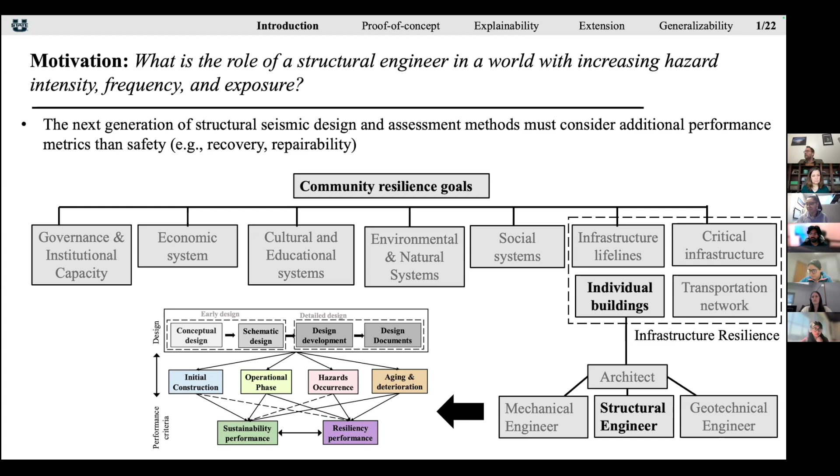Now, being a small part of a big thing is never a bad thing, right? That doesn't mean our contribution is small, because the way I think about this is that we have this very complex problem in front of us. It's all about how we can bring design and assessments together, where we can think about initial construction, operation, hazard, and aging and deterioration of the systems, and then connect all these different aspects of our infrastructure to think in terms of performance metrics. Now, what I was really interested in was resiliency, but also sustainability. And these metrics, I think in the future years, irrespective of how we think about them, are gonna be very important for the science.

Now, for those of you who may not have heard about performance-based engineering, it is really a way of thinking about systems, a probabilistic and modular framework. Typically, it came originally from the earthquake engineering world, but it has been applied to all other different hazards. For some other hazards like wind, we have a very well-defined performance-based engineering system. But for some other hazards like tsunami or hurricane, all the modules are still under active research. Now, in all these different frameworks, there are some commonalities. They all have a hazard analysis, which talks about the intensity, frequency, and the exposure that the system's gonna get from this hazard. It always has this structural analysis portion that talks about how the system will behave to the intensity and the frequency of the hazard.

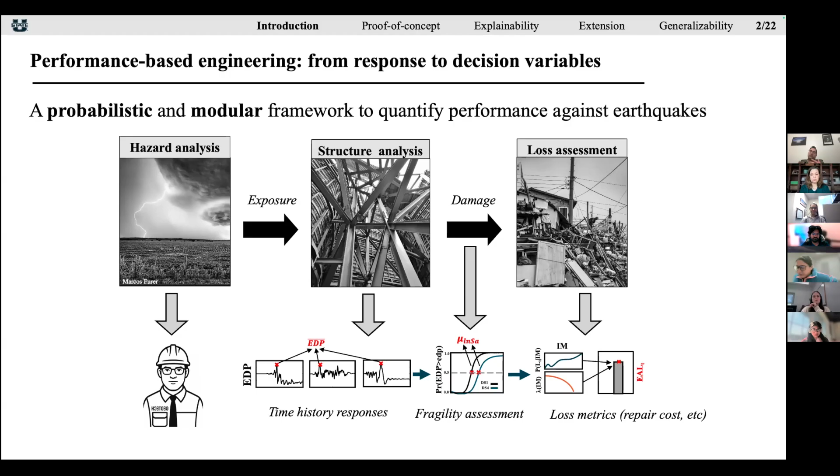And then what I call loss assessment, though that's a loose term, this is really trying to connect the damage and the responses from the systems to what's going to happen on the decision making side. And this can be repair time, recovery, downtime. Maybe you've heard about functional recovery. There are many, many metrics that are becoming increasingly important as we start to think about community resilience.

Now, how did all of this start? Really, when I started my PhD in 2018, my advisor was like, well, you seem pretty interested in this and you really like machine learning. And at that time, full disclosure, machine learning was there, but it was before the generative AI boom of machine learning, right? So at that time in 2018, I thought maybe I can bring everything that I like under one unified system.

And the idea was, can we use machine learning to support performance-based assessment and design, because they need a lot of different kinds of simulation, many components that go inside these frameworks. And we thought that maybe by using machine learning, we can create surrogate models. And these surrogate models can serve as some computationally inexpensive mappings for us to ease the burden, at least at some point. So it becomes actually an interesting problem of, okay, what are the steps where we want to use machine learning and what are the steps that we want to keep as a physics-based approach.

And then I had this idea, which at that time my advisor was very suspicious about. People were looking at the nonlinear responses and connecting that to the system's properties. But I had this experience as a structural designer. So I was like, can we just focus on the geometric and design parameters of a system and connect them directly to the decision making systems, right? Now naturally the question was, well, a lot of error sources are going to propagate, and then maybe we don't get a good mapping, right? So this is how it all started.

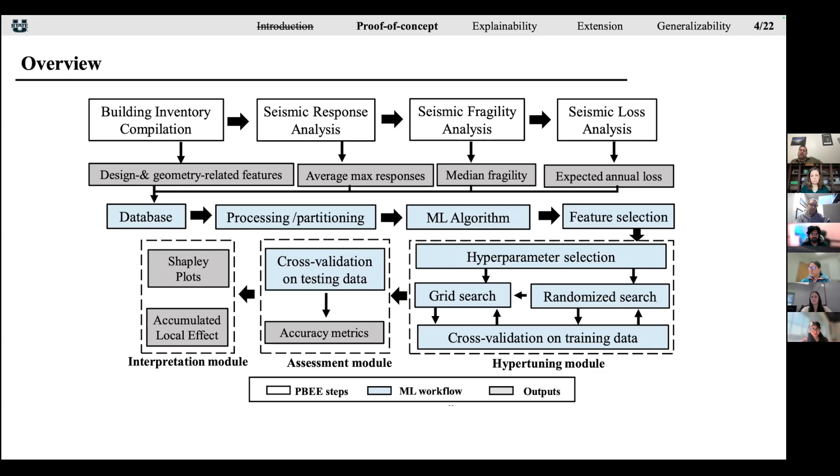Now, back in 2018, I think DesignSafe by NHERI and TACC were pretty new and people were starting to put data there. So I started to look for the data that could support my work. And there were not many open data sets of finite element simulations of engineering systems and even buildings, which was the topic of my NSF project. So eventually I had the idea that maybe I should create the data.

So it started by creating some computational tools and then connecting them in this infrastructure that can go all the way from, and I don't want to call it a very exact design, but it was more of trying to sample these design parameters, then do some initial checks to see if they're even feasible, and then do some sort of nonlinear analysis to see if the life safety objective of the code is met. And after that, I would keep that design and do all the other performance-based assessments that I needed at that time. I'll be happy to talk about this, but I'm trying to keep it short.

We did this and it was very interesting because the place that we chose was Charleston, right? If anybody has worked with Charleston, it has a very interesting seismic situation with a negative epsilon, which means that selecting ground motions is not like places such as California, where there are well-defined databases of ground motions and much research has been done. But for Charleston, it was not like that. And at that time, one of our challenges was to find ground motions for the characteristic earthquakes that we expect at that place, right? And then we worked with some seismologists at Virginia Tech.

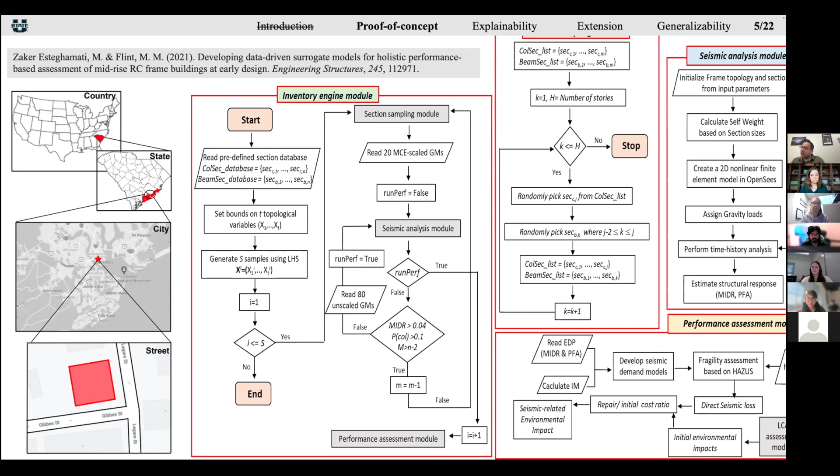We eventually ended up using some synthetic ground motions to be able to do the analysis that we wanted to do. With that being said, and this is back in 2021 when the paper got published, right?

We went through this process, we get our data, we put that data into this machine learning pipeline, look at a few classical machine learning algorithms like support vector machines and random forests and all these different algorithms. And we saw that actually we can do this mapping, and this mapping can provide a good accuracy. And again, I don't want to make this more about, oh, 96% accuracy, so we did a good job. It was more about we saw that we can capture this performance across a good range of the value that we were looking at.

Now, if you're wondering, we captured something called EAL, or expected annual loss, which is basically an annualized repair cost of the building for the possible earthquakes in that region. And this is a metric that has a lot of use for decision making. And our idea was, what if we use it directly as a design target? And if we can find the designs that match a target EAL, then imagine the implications.

Like in future, communities are having structures that are not just built based on life safety, not collapsing on people, but more like, well, for the earthquakes that we expect in this place, we can keep the economic losses to a certain threshold. That would be beautiful if we can do something like that.

Now, as soon as we did that, I started to get interested that, well, I have this support vector machine. This is a block of code somewhere that does this mapping, but it's just hard to communicate that. It's hard to understand what is happening inside this model. And if you've seen support vector machines, it's like a kernel being applied, and you're trying to find this decision boundary and putting the data at the right place. It's very hard to communicate that, and it's hard to understand what is impacting things, especially in a design problem.

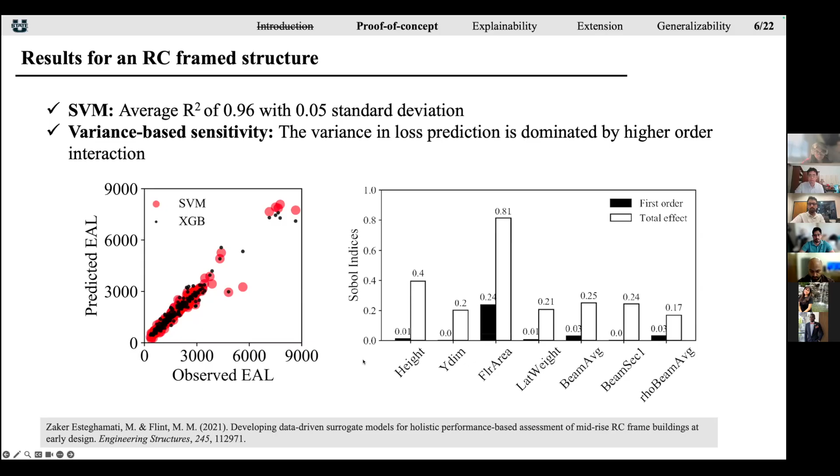How is that affecting the variance in the output? And what we saw here, the black columns are the first order, and the white columns are the total effect coming from all the higher order interactions. And we saw, though the number of features with a strong first order effect is small, all the features in the model had higher order interactions, which to me was a sign that this mapping is actually pretty complex, because all these features are having high second or third degree interactions with each other. And that was kind of a motivation that maybe I should go a bit deeper into explainability of these models.

Now, when I started in my new role, one of the first things I did with my PhD student Shiva was, well, we did it for one database. But maybe I made the database with my own biases in a way that could support this mapping. What if we can find an independent external data set and try the same mapping on that? Now, the good news is that over the years, DesignSafe is now full of data.

So if you're a graduate student doing research, I strongly encourage you to look at DesignSafe. Everybody in the community is helping, and there is so much valuable data. Often we don't know what exists there, but I think you may find something that can be very useful for your projects. And I also invite you to publish your data if you can. Talk to your advisors and see if you can publish your data there. This is what I tell all my students, that we should publish them.

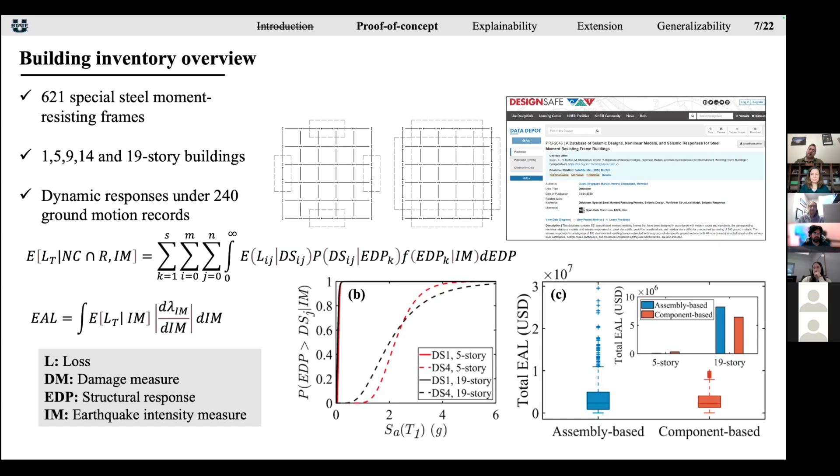Anyway, so we looked at this database of steel frames by Dr. Burton's group in UCLA. We've used this database extensively in our recent research. But basically, my own research was on concrete frames in Charleston. Now we have this database developed by a different group of steel moment frames in Los Angeles, different designs, different ground motions, different in many things, right?

And we start to look at more design and geometric features and more metrics besides EAL. We start to look at fragilities and recovery and more stuff in that database. And then we saw kind of the same thing, that we can pick several algorithms and some algorithms can still do the mapping. Actually, quite interestingly, the same support vector machine and random forest that was working in my data set with like 90% R square was doing the same thing for this database that was independently generated by a different person.

To me, this is a good measure that this approach is not limited to one data set and how we are building this model. We can map these designs to the performance metrics and have machine learning models that can work within the ranges of the parameters that we're looking at.

Now, I want to put this cautionary tale that we, as engineers and scientists, get excited about algorithms, but really from an application perspective, a lot of times you see these algorithms perform relatively similar, right? So I think it's important to understand that it's more about the feasibility of doing these mappings rather than, oh, it must be random forest or it will not work. I don't think it's like that. I think there are many suitable algorithms that can do the mapping for us and they're going to have comparable accuracy.

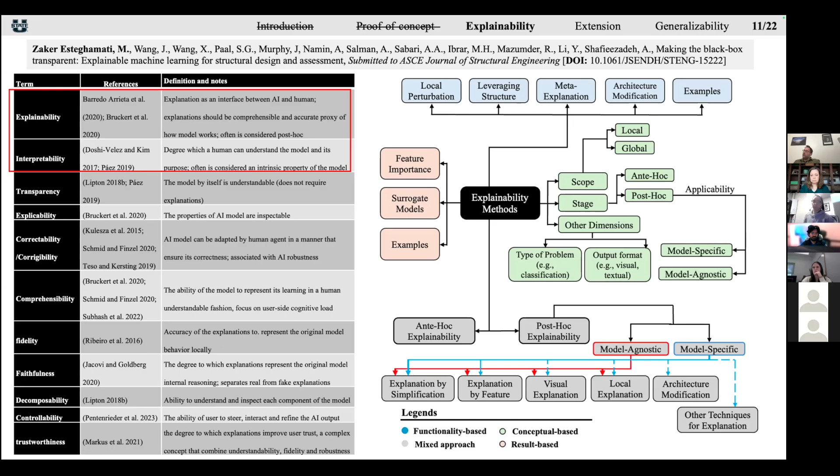Now, we did the literature review. We looked at a lot of papers in the field, and SHAP plot is, in our understanding, the number one approach that people are using whenever they talk about explainability of machine learning models. I want to emphasize that's really a post hoc approach, a good one, but just one way to think about explainability. It's not the only way to think about this matter, right?

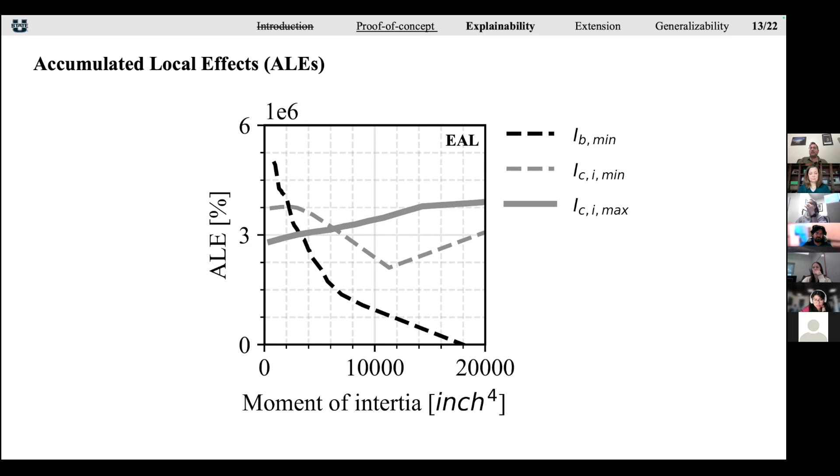As soon as you see this trade-off, the first thing that comes to mind is that, well, then we can write an optimization problem and find the best combination of these features that can really give us a good performance-based design. And this is something that I did last year, and it got published. The idea was, can I use these machine learning models that I can understand and use them as an engine for optimization to solve the inverse problem?

Basically saying, well, I have the geometry, you give me the design parameters that can get me to a target performance. And that would be, in my opinion, a game changer, because instead of the iterative process that we have right now, we can solve the direct inverse problem. And this is really because of the machine learning and not because of the optimization, because the machine learning is the engine, is the fitness function here, right?

And if you're looking at this, you see what parameters I'm picking. IB min and WT, these were the most important parameters that we were understanding from this.

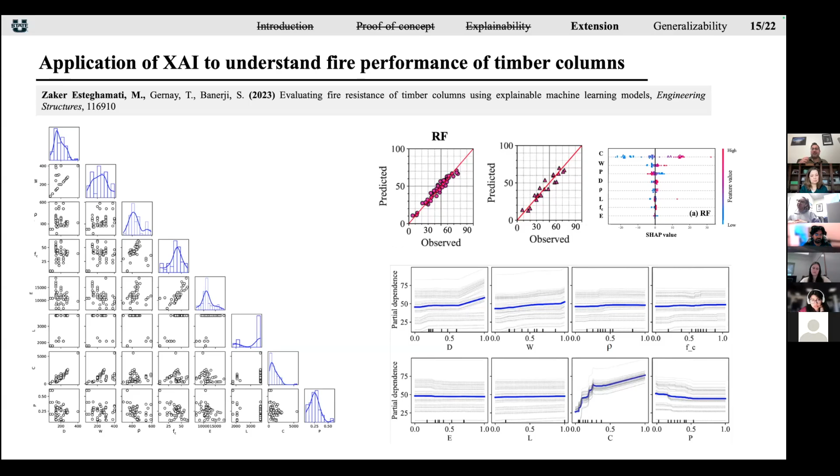And we started to see that the most important parameter was the capacity of the column at ambient temperature, which is what we expected from the physics of the problem. And we see that the model is also picking up on that. And then we see that the material properties were not super important. And we see that the dimensions are very important, which basically tells us the loss of the section is really what is influencing this problem.

We started to look at the composite flooring system. This is something that we are writing as of now, so this hasn't been published or even sent for review. But here's a sneak peek into this. We are starting to look into flooring systems, doing the same thing, trying to understand what are the parameters that influence the fire performance of these composite flooring systems. Okay.

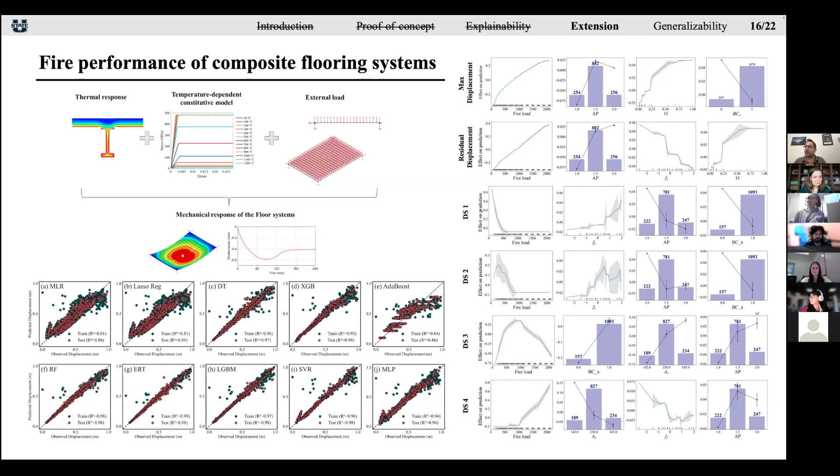I'm going to use my last 10, 15 minutes to talk about something that I think can be super important. As soon as we talk about machine learning, we show the models, we show the performance, you're always going to get this question: yes, but is it generalizable? And by that, people usually mean, okay, if I take these models and bring them to a different problem, would they still work, right?

Now, I had the same question back in 2023. This is the last thing I did as a postdoc. And I said, okay, I have my database. What if I go and create a sample with a totally different geometry from what was in my sample and a bit of a different approach to the design? Would my model work well, right?

So my models were between 4 to 6 stories in the training data. I got a two-story. And those of you who are coming from the earthquake world, you know that short buildings behave very differently and dynamically than mid-rise buildings, right? You're going to that pesky part of the design spectrum, right?

But still, sometimes we are just close to them, but ooh, I get excited. But sometimes they're pretty far from what they should be, right? And this is what people usually observe and makes them suspicious. They're like, oh, sometimes with machine learning models, you change things, they can really go wrong, right?

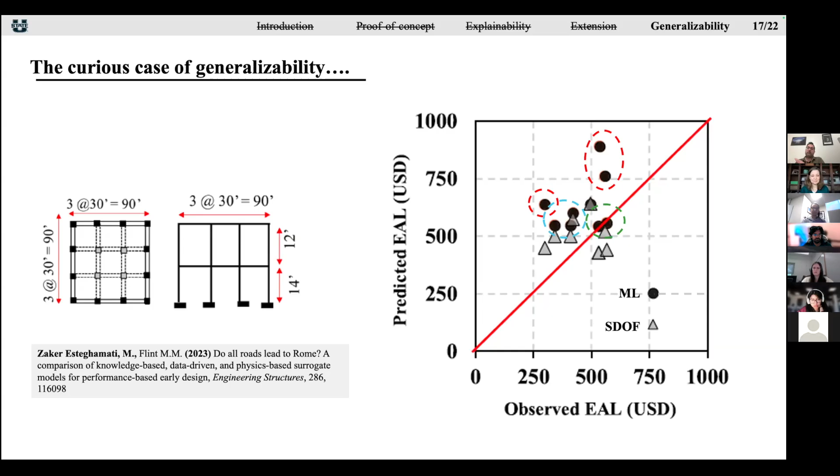So I started to think about, yeah, we can see this. And one of the remedies is you're going to say, well, my machine learning model only works for this range of parameters. You shall not use it for anything else, right? But I was like, can we do something to make it a bit better so that it's at least less sensitive?

So I want to also talk about this, which is a bit different from generalizability, but a problem that some of you will see. It's a standard term in computer science: underspecification, which is different from underfitting.

So underspecification basically means that if you have an overly parameterized machine learning model, you can find different combinations of the features such that both of those models work very similarly when you train them. But as soon as you take them to an independent test set, they're going to act very differently, right? Because you're not really defining your problem in a unique way and your model is underspecified. And I want to say that sometimes the issues that you see in generalizability are underspecification, not generalizability. So be aware of that.

And if you are interested to know more, here is a paper for you that was editor's choice. So some brag there, but hopefully that can be useful to your research. And we started to talk about this underspecification and generalizability.

And I have this very smart colleague in statistics, and he was basically asking me, why do you guys always use this randomized split of training and testing? Your data sets are so small. If you do a randomized split, how do you know you're capturing the important data trends? So we started to do adaptive sampling, basically saying, well, I know my important parameters from the physics of the problem. Let me make sure that distribution is kept in my training and testing.

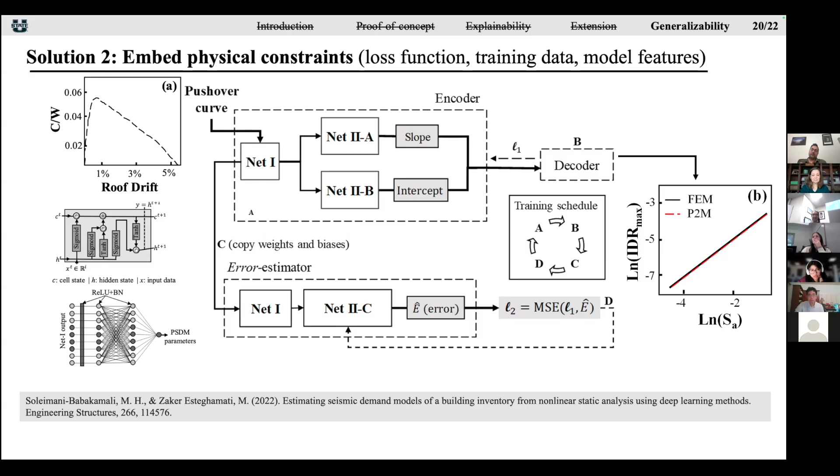Now, this is a very new thing that my student Parham and I are thinking about. We are going into generative AI, because so far everything that we did is discriminative AI, which is input-output mapping. But we are thinking, can we create generative AI, the way that ChatGPT generates things for me, that generates designs for us? But of course, we don't want it to hallucinate and give us designs that are not realistic.

So we are thinking, how can we embed physical relations into this generative model, which is a transformer model? We started to do some stuff, and the reason I'm showing this is that it's very early stage research and it's not super successful. We are just trying this. We see some promise compared to a baseline model. This is a bit better, but still,

The good thing is that by doing this physical embedding, whereas before our transformer was sometimes generating very strange designs that were definitely questionable, with this approach we remove those very fake designs. But now we are on the next improvement stage: can we now make it much, much better than purely data-driven models?